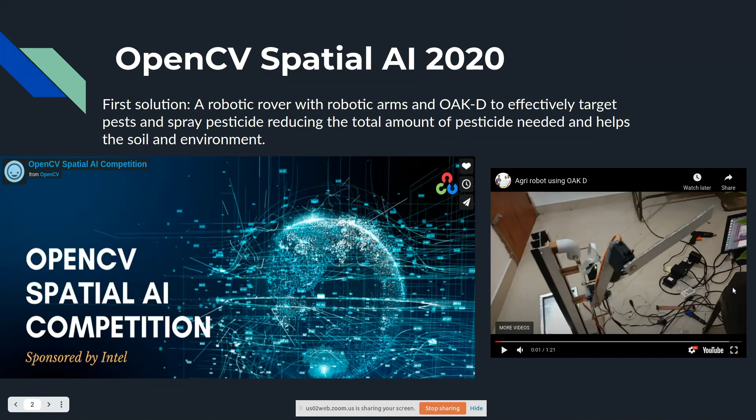Exactly. Okay, that's great. Okay, so the story is somewhat like an adventure. We have a team of 4 people that are working on the backend side, and I'm trying to connect with them and get most of the information from them. We also have a community called the Spot Micro AI community to help us solve some of the greatest problems facing these kinds of quadruped robots. So we have an international community, and some of my colleagues are currently working on this system. So it's like an adventure.

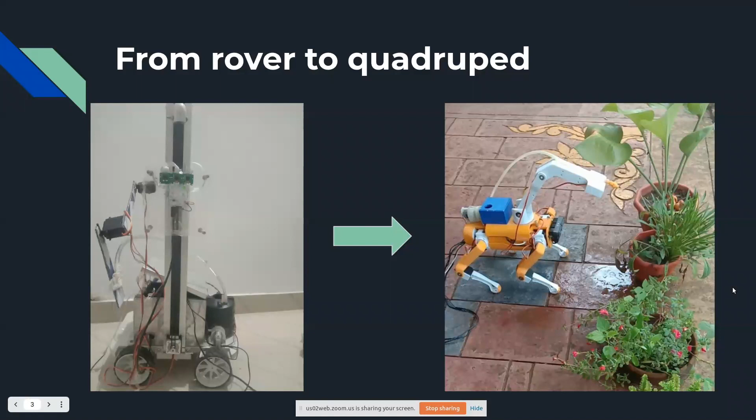And what was the motivation to go from a rover to a quadruped robot? Is it because in an agricultural environment you cannot always have a smooth surface for the rover, so you need a quadruped? Is that the reason? Exactly. That's the problem that we are trying to solve. We have taken the crop as the cardamom plant. Cardamom is one of the most pesticide-sprayed plants in the market.

The problem with this terrain is that it's quite uneven. We visited some of the fields in our area, and we see that the terrain is somewhat sophisticated. When you are integrating a rover system, you cannot actually push this to a further level. Even if you have a belt drive system, you cannot do it. The terrain is quite uneven, so a quadruped robot helps a lot. That's why we switched to a quadruped robot rather than a rover. Got it.

And as it progressed, we visited some of the farmers, and we found that they have problems with the agrochemicals they are spraying, and they're spending a lot, like 70,000 per acre. We chose the cardamom plant because if we can implement on this kind of highly sophisticated terrain, it's an easy task to implement on any agricultural field, like a vegetable field or a paddy field. A paddy field is quite sophisticated, so you need to switch to some other level of robots. A vegetable field is something we can implement after implementing on this small cardamom plant.

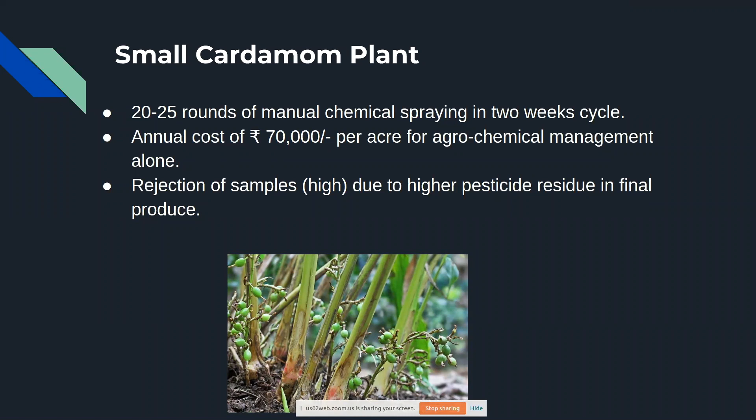Okay, I think let's move on to the next slide, right? Yeah. Okay, right now we term this as version 1.0, which is actually a fully 3D printed version of Spot Micro. That's a fully open sourced quadruped robot, and you can find the STL files on Thingiverse. You just go on the Thingiverse website and search for the quadruped robot. You can find exactly the same 3D printed designs or STL files, and you can actually print it yourself.

But we actually changed a lot on the stability, as we tested it to a lot of levels. Most of the time the leg breaks a lot, and it's like a disaster when we are testing this. So we need to change it to some levels, so that it can withstand some of the harsh environments that we are trying to test. So small changes happened during the progress.

So right now you can actually take the print from Thingiverse, and you can make it in your home. It's not that complicated. You can actually do it. How much time does it take to put this together? Let's say you have access to a 3D printer. Let's say I don't know anything, I'm a regular engineer. For me to put this together and get it walking on its four feet, how much time would somebody spend on this? A day, or is it just a few hours?

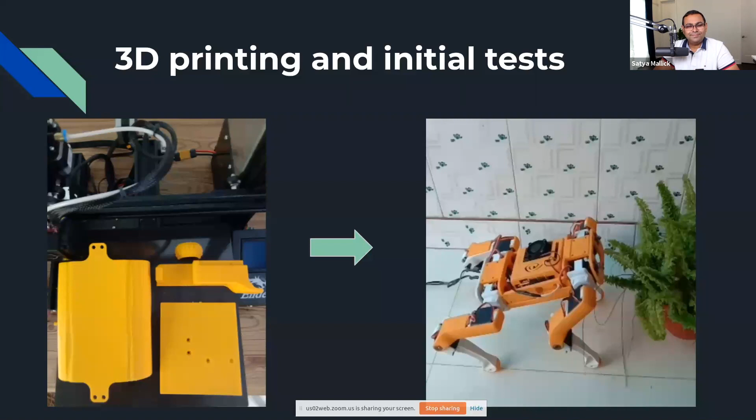Most probably plenty of webinars have happened on the OAK-D. So I'm just explaining why I used OAK-D on my quadruped robot, from a balance perspective and also from a vision perspective. I implemented it because it has the XYZ axis, which matters when we are doing balancing, and also in the arm, you have to design your arm based on this OAK-D that's provided by the Luxonis community.

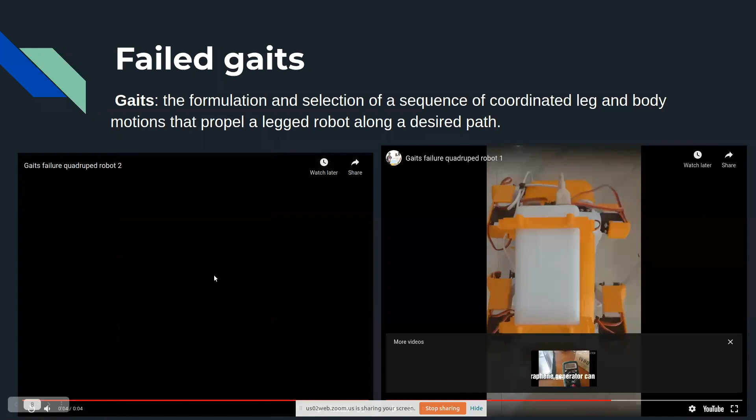So it actually fails, because if you look at here, that's not moving in a synchronized way. The diagonals are actually not moving in a synchronized way. So just look at that. That's the problem that happened over there. And the same way in here, I just put it on top of the camera. The camera is on the top, and the synchronization is not there. So that's the problem.

The code and software that comes with the robot, does it not work out of the box, so that you can actually get it out and ask it to move? You have to code that gait yourself? No, it's actually simple. You have to calibrate each of the legs. All the legs have to be calibrated to a certain angle, which is actually provided by the repo itself, where you can use your laptop or PC keyboard to move all the left and right legs. We have 4 legs here, right, to its angles.

So you have to note down the angles. Note them down in the YML file that's in the SRC folder of the Catkin folder. So you have to put the YML file over there. That's the calibrated file. What exactly happened is I worked for almost 2 to 3 weeks on the same problem, but the problem happened because I didn't look at the calibrated values. Those are pre-calibrated values provided by the repo.

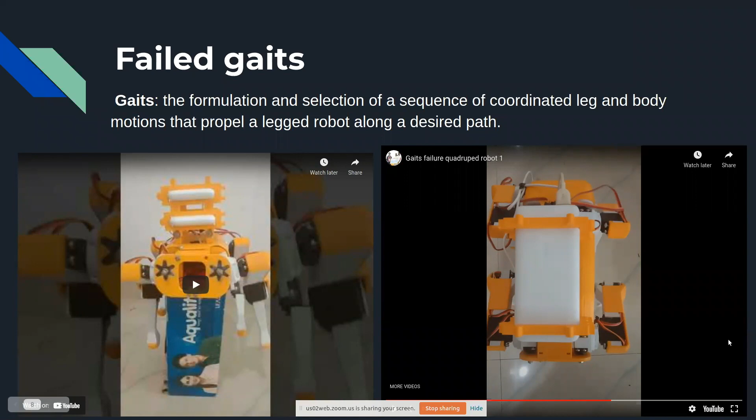Making it work on Jetson Nano is a tedious task, while it is very easy to implement on Raspberry Pi, because the image file that comes with Raspberry Pi already has ROS installed. So you don't need to make any change. You just use the existing folder from the repo, and it's like taking everything out of the box and implementing it. But implementing on Jetson takes a lot of time. Got it. Okay, let's move on.

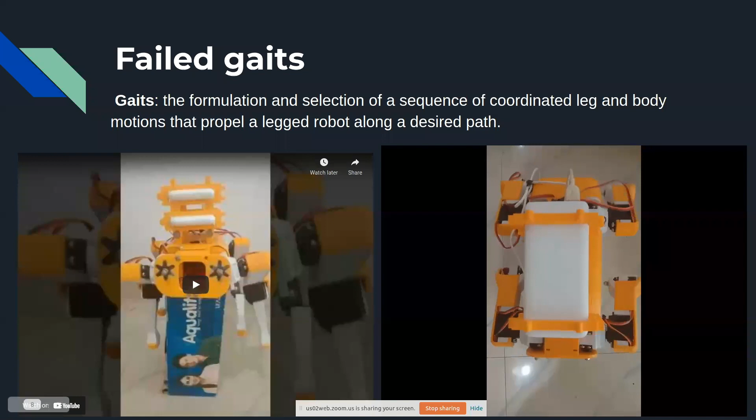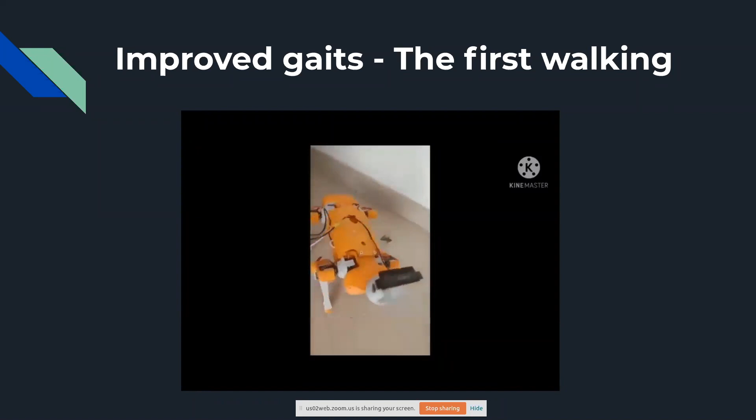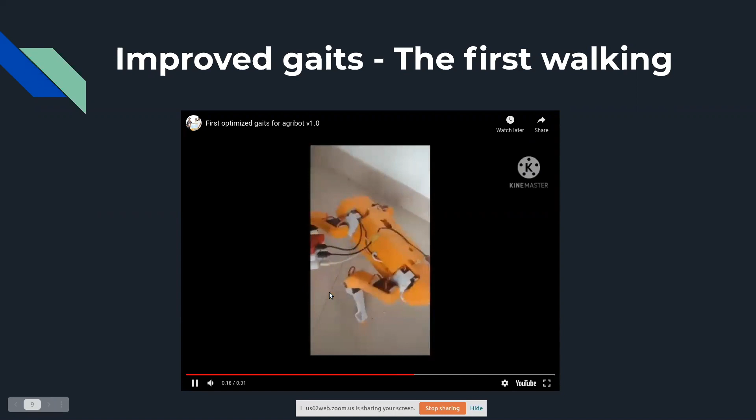Okay, let's see. Now it's actually improved a lot, but not perfect. It moves, but it has some problems. It's not moving so fast. It's like moving in a stationary way. It's not that fast right now, but it's improved a lot. You can see the power bank that's powering this one, and here are actually the optimized gaits.

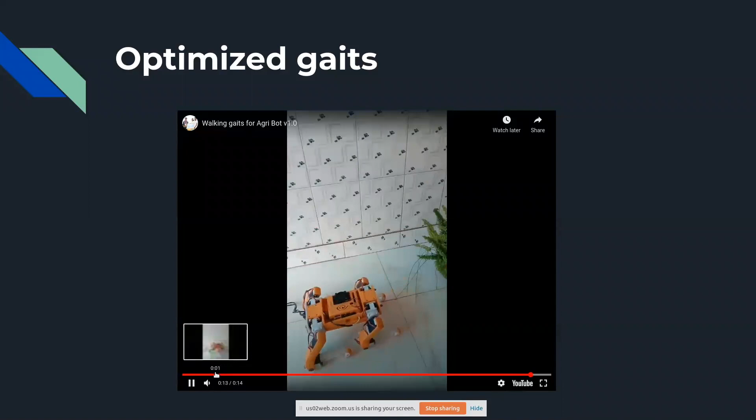It's actually quite improved, and it actually runs a lot better than the previous one. That's the optimized one, and it's actually more optimized than the previous one. So right now it's much better.

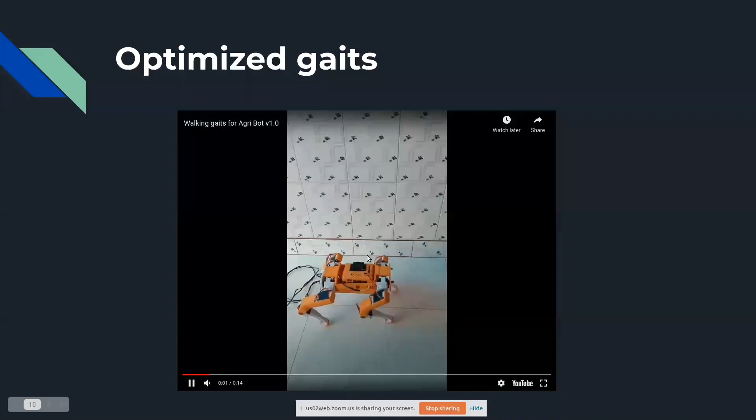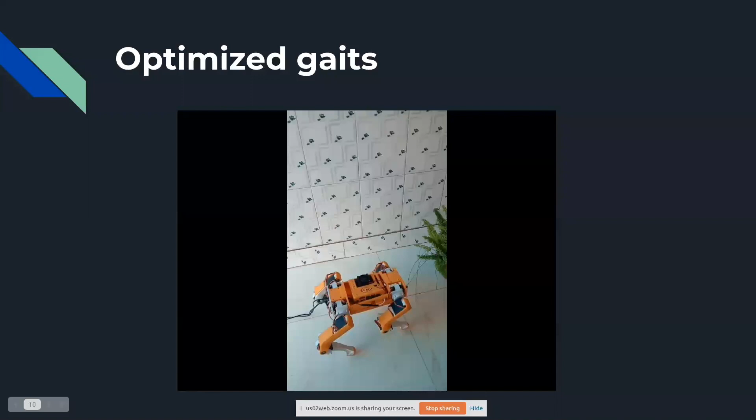So it's controlling from a keyboard, and the Jetson Nano is connected to a VNC. I'm actually virtually controlling it. It's connected to the same Wi-Fi, so I can control it from my computer. So this is the optimized gait right now, much better than the previous one. So this is actually what I've done.

I disassembled everything. In the previous failed case, I had to disassemble every part from scratch and reassemble. And when you're reassembling, you have to calibrate. Right. So that made a lot of improvement. Yeah. It's like an optimization problem. You have to find the exact sweet spot to make it work.

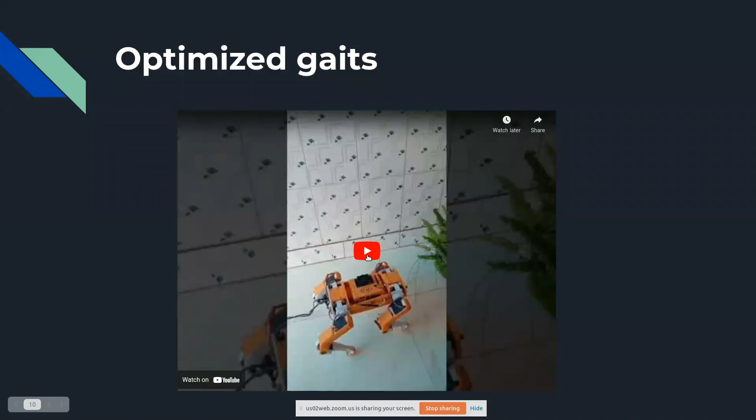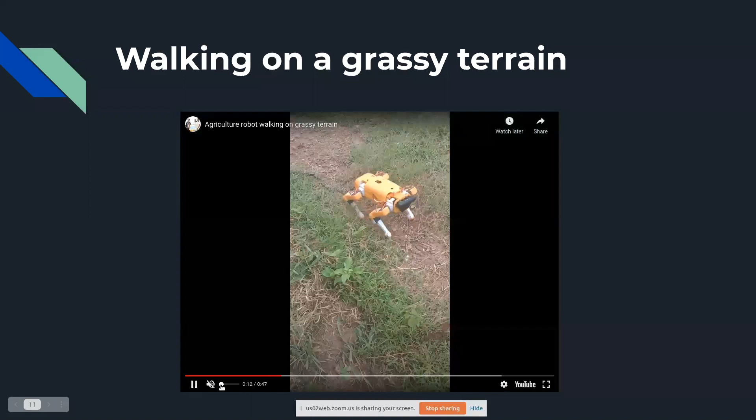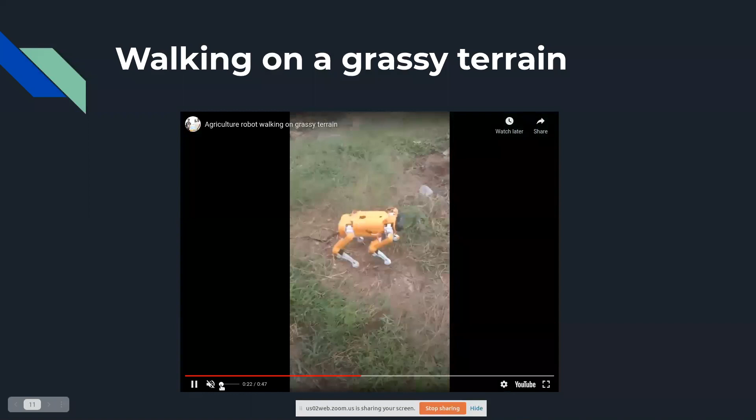Right. And the next one is actually the most interesting one, where we put it on a grassy environment. That's the terrain that we will definitely implement. And in here, it takes a lot of time when it is moving on this kind of terrain. Yep. And it's the most successful experiment that I have done so far on the walking gait.

So right now you can see the camera is from a Raspberry Pi Zero W. It's not from the Jetson Nano. I didn't connect the Jetson Nano to it because it takes a lot of power. So when you connect it, everything stops working. I need to connect it to an external power supply. So right now it's connected with a Raspberry Pi Zero W.

That's a small Raspberry Pi, and the visuals that are seen are actually from the Pi Zero W. And it's quite fascinating when it works on the field. It's so satisfying to see it on the field itself.

Yes, that's absolutely true. Does the camera provide any feedback on the motion? Can it actually improve the motion of the robot, based on depth analysis, etc.? So can it look at the terrain and say, this is the next motion, or this is how you should move next? Is that something that you do or plan to do in the future? Yeah, that's the thing that I'm planning to do, and I'm trying to achieve that right now.

Okay. The idea is you're getting the exact location values, the XYZ value, which is the distance to the object. That's the value that we want. And from these values we can stop the bot. Say if the crop is around 2 meters or 1 meter from the bot itself, you get the value 1 meter. So you give the bot a command.

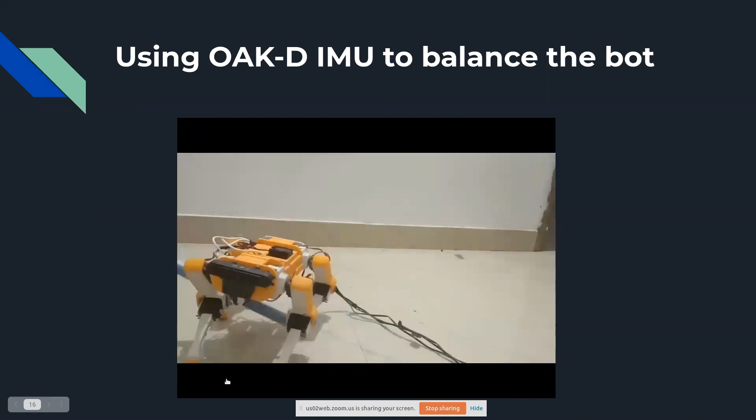So if you see here, it changes its orientation to adjust to the situation. That's the idea, and it uses the quaternion angles from the OAK-D. So this is the actual feedback that it's getting from the camera, and it's integrated with ROS. That's the core powering the motion of the robot. Yeah.

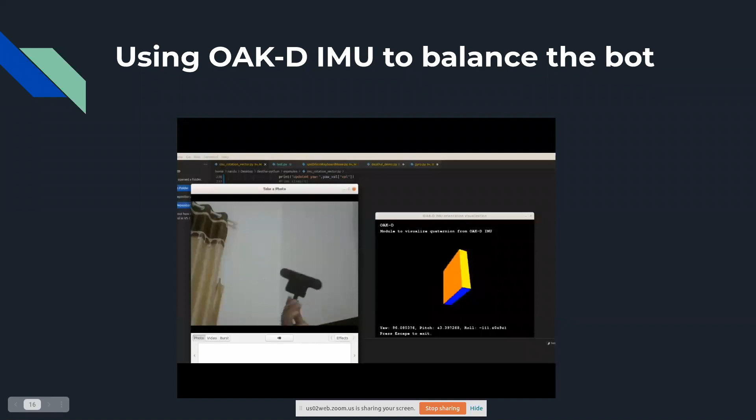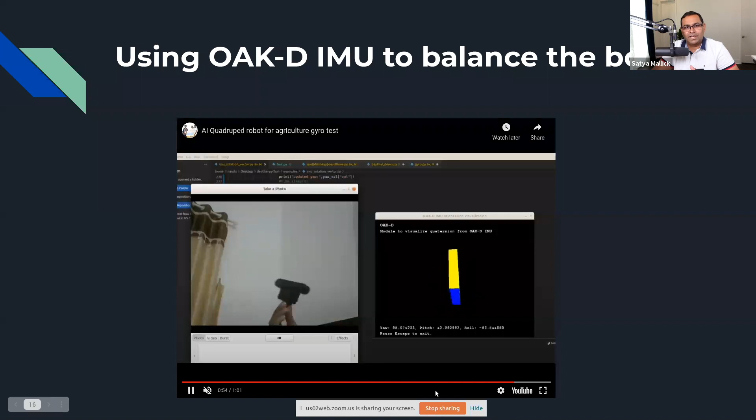And this feedback has been fed to the bot. So what you're looking at is OpenCV AI Kit with depth. That's the video on the left. And it has an IMU, which is basically a sensor that gives you the orientation of the camera. And this on the right, you're looking at the output of the orientation as measured by the sensor. Is that correct, Kishore? Yeah, exactly.

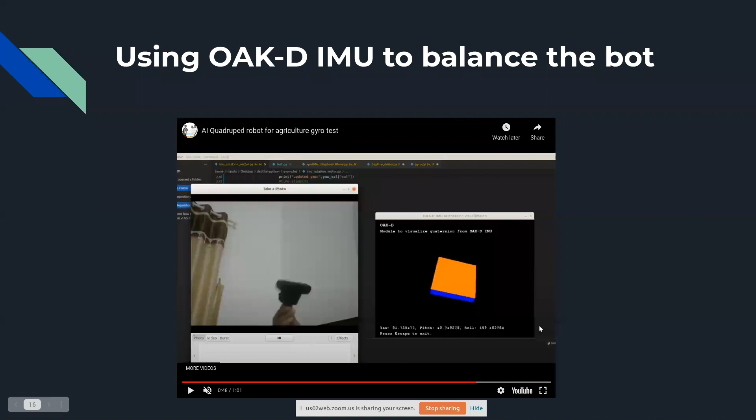It has the gyro and accelerometer values, and we are actually taking the gyro values out of it. You get the values out of it, and you're just mapping them onto a visualization library that's provided by Python, and it's just showing the gyro values. That's it. Okay. So let's keep going. Your original slides. Yeah.

So the next one is actually the robotic arm part. There are a lot of challenges. It's an engineering problem. Either you have to put the camera on the arm end, or on the front side of the bot. The actual solution you have to implement on both sides. You have to put one camera on the arm, and one camera on the bot itself. And the idea behind it is you have to get the location of your arm and adjust the bot according to the robotic arm, and also adjust the robotic arm according to the quadruped robot position.

So there are two OAK-Ds on this bot. Is that right? Yeah, but actually we have not integrated the OAK-D on the arm yet, because it needs to be adjusted, because the size of the OAK-D is quite big, and the center of gravity is causing some problems. So the physics is actually the problem right now. We are trying to achieve both, but right now it's just on the bot. Okay, so on the bot, almost like the eyes for the bot. Exactly, that's right.

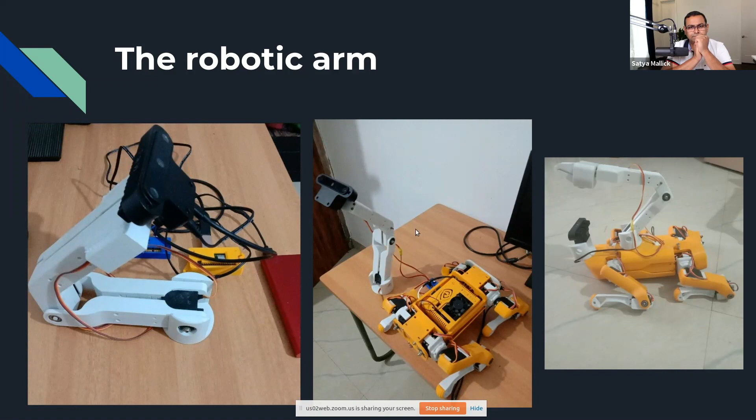So basically the idea, without the sprayer system, is what we are trying to achieve. That's the experiment we have done by detecting the crop, or say potted plant, that's already in the COCO model provided by the TensorFlow community. You make it a blob file for working on the OAK-D. So you get the location of the potted plant, and you send commands for how much angle it should be rotated, and you put the end of the arm over there. So this is the first experiment we have done without the sprayer system. Right.

Okay, so in here, this looks at all the potted plants, and once it locates a potted plant, it walks to the potted plant, and that neural inference, the determination that this is a potted plant, is being done on the OAK-D. Is that correct? Exactly, that's right. Okay, and then it walks to the potted plant. Does it walk autonomously, or is it through the keyboard? Right now it's through the keyboard. Right now it's completely manual, but the arm motion is autonomous. When the detection happens and the distance is satisfied, the arm should move towards it.

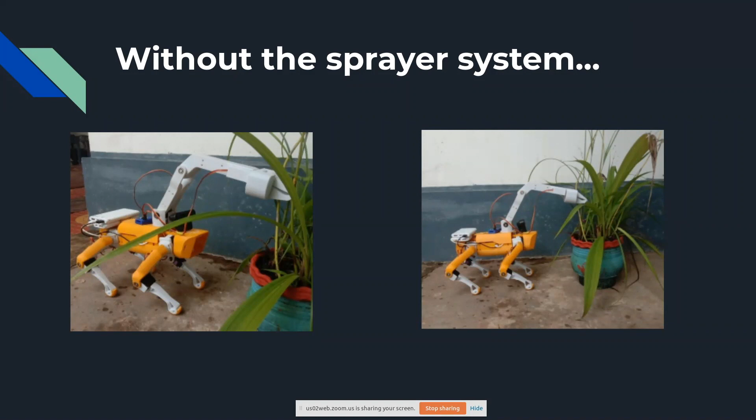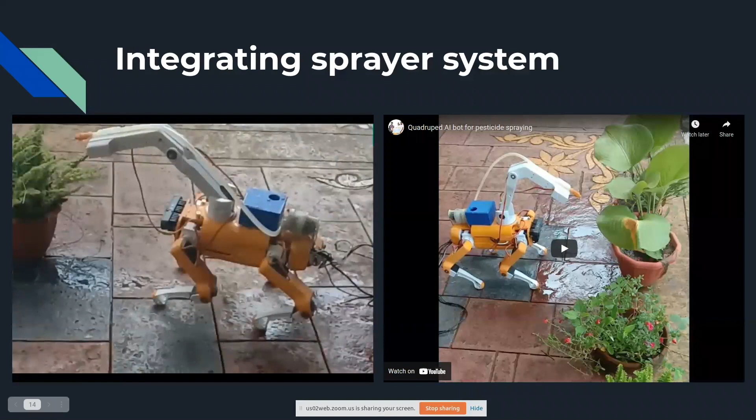And so right now you can see, as Satya explained, how it actually moves and sprays. All right. So it's actually integrating the sprayer system on it. Always dangerous and interesting when you have electronics and water.

Exactly, that's the problem. That's the risk that I have taken. It's like months of work, but it can be destroyed in seconds if the water falls on the Jetson Nano. It will be a disaster. You have to start everything from the beginning. Right. So it's like taking a lot of risk when water is over there.

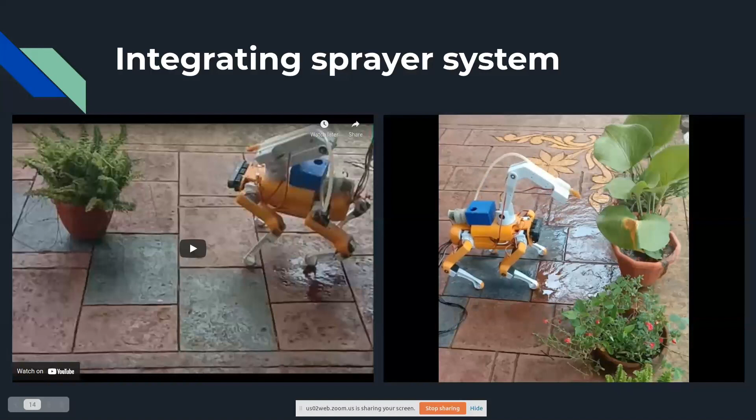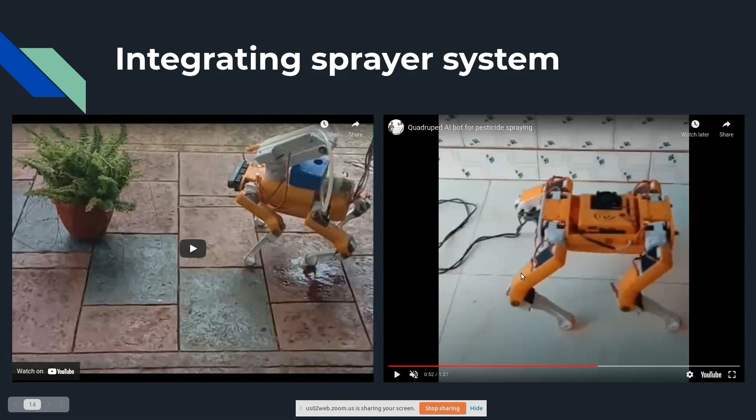Yeah. So in here, you can see how it actually sprayed. So it detects the plant. So right now it's actually using the Raspberry Pi 0W, and the motors are not attached to the Jetson. They're actually attached to the Raspberry. Raspberry is the one that controls the robotic arm and the DC motor. That's a pump. That's the interesting part. We actually don't use the Jetson to do that. So that's the sprayer system for you. Okay, now let's move to the next slide.

And using simple trigonometry, you can actually calculate the angle. That's the angle the servo should rotate to reach that exact point. Right. So when it detects the potted plant, is it trying to put the roots at the center, and then spray not on the root, right? It has to spray on the leaf. Yes, it actually sprays on the leaf itself. In this case it's finding the center, and in the experiment you can see it's pointing on the bottom side, I mean on the surface of the plant or the root.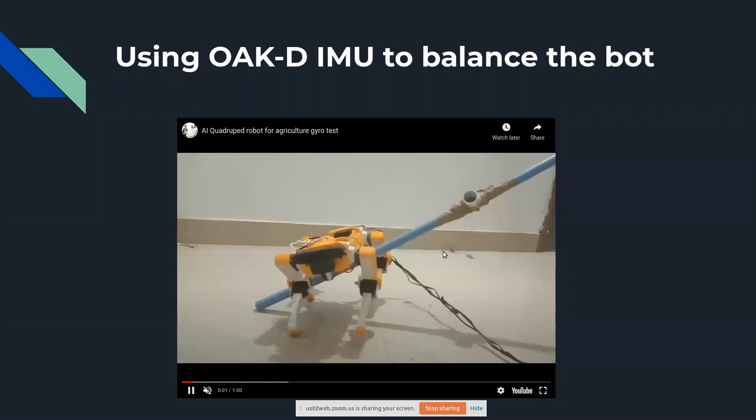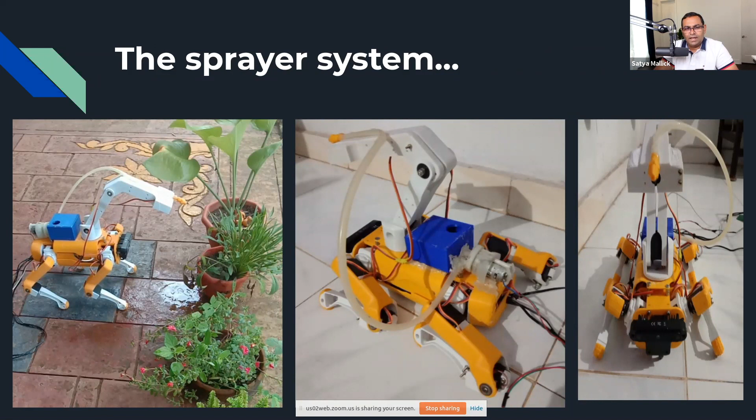So you're using 3 parts of OAK, right? First, the neural inference to detect where the plant is, and you're also using depth estimates to focus the tooltip, where to spray, for your inverse kinematics. You're using depth from OAK-D, and finally you're also using the IMU for stability on OAK-D. Is that fair to say? Yes, exactly. That's the overall system right there.

So in here you can see the DC motor that's powering the tank right now. And when it reaches the destination, it sends the command to the Raspberry Pi 0W to start the motor and spray for around 2 seconds, then stop and retract the arm to the initial position. So that's the simple logic that has been implemented.

Right. And in the future, the original idea where you're detecting whether there is some pest infection or not, right? That's an easy task. But as we analyzed the situation and talked with agriculture experts, pest identification is not that efficient, because sometimes pests are on the bottom side of the plant or on the leaves, and they are so small. The resolution is quite small, and the SSD MobileNet cannot do it, even with the feature pyramid network.

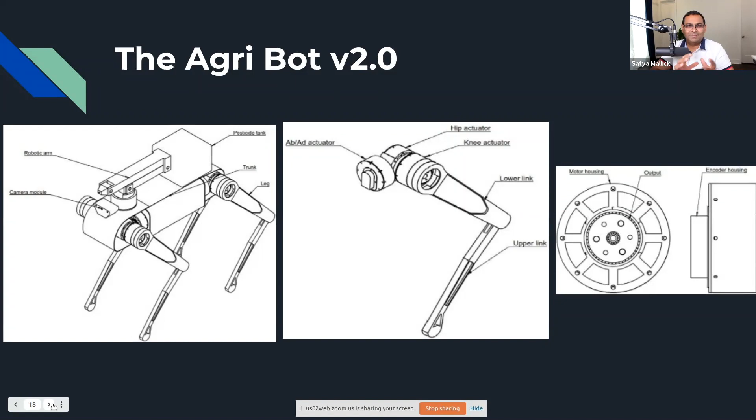On the other end, we also see people who have spent years, right? Like the robotic companies we had on the OpenCV webinar recently. They spent years developing their robotic solution. So yeah, I think Scythe had been, what, 2-3 years of work by then. Yeah. So we have to keep things in perspective that this thing has been built in about 3 to 4 months, under extreme circumstances with the global ongoing pandemic and the shipping catastrophes and all of this.

Yeah, that's right. And so you're planning to make this open source, right? The second version also? The second version, we cannot do it because it goes to the industry. So the first version, we will open source it, and we are gathering every resource that we have right now to make it completely robust and completely documented. So version 1.0 will be open source, and version 2.0 is not yet open source, but you can find the exact design on the internet. If you search a couple of times, you can find the design, and there are Discord communities to help design it. If you are so passionate about it, you can design it if you want.

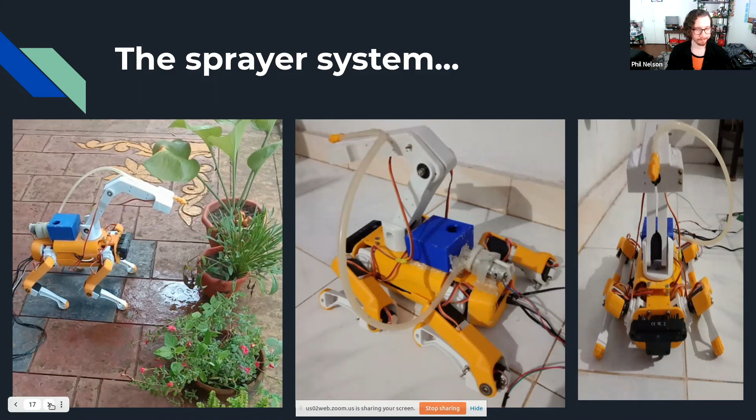So some of our colleagues and teammates on the operations wing visited a farmer called PB Anish. He's a Kerala government awarded farmer in the best agriculture category. He has around 6 acres of farmland, ranging from cardamom plantation, nutmeg, pepper, coffee, dairy, hens, etc.

So we got a lot of information out of it, how we can actually implement. And he's so excited about the quadruped robot. He's saying that it's going to revolutionize his field. So he's a techie farmer, and he's also trying to implement drones also. So that's future. So he's quite interested in our Agri-bot.